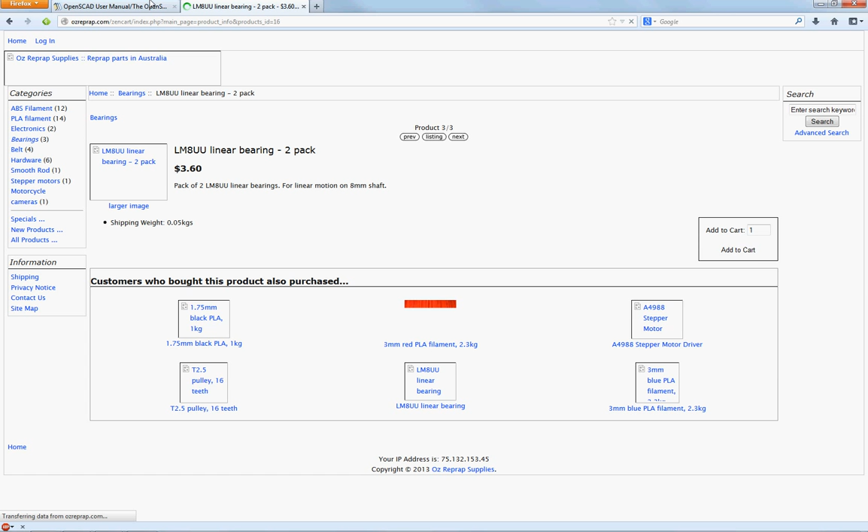While that's going, I'm going to kind of tell you where I'm going to start. I'm actually going to use an iterator function, a for. So it's going to be using it to... LM8UU bearing pack. So these, right there. There are three rows of bearings in a plastic sheath and surrounded by a metal pipe.

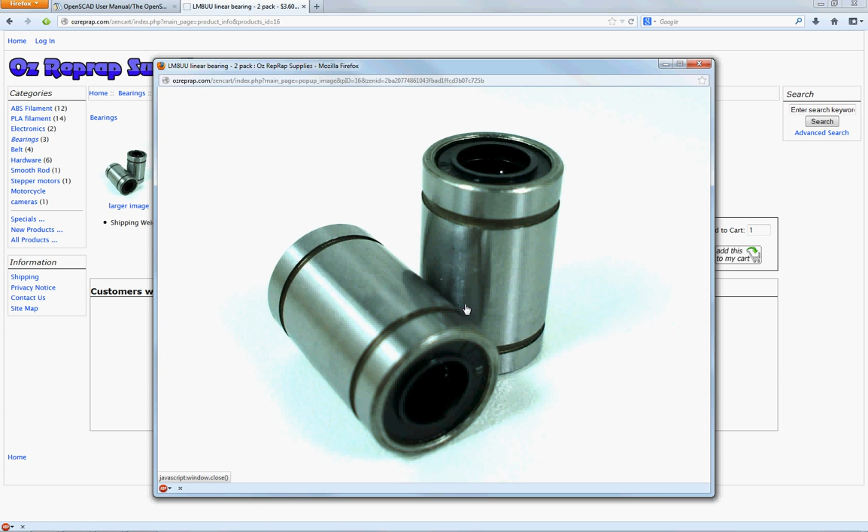I was thinking I could print something like that. Do a little bit of machining on a metal tube. Maybe make a lip and use some snap rings to keep it in and see if that works. So, again, I'll go back to this. We're going to use an iterator function. We're going to use for and something similar to this, for i = [0:5].

But I'm probably going to use like for i = [15:10:30]. That doesn't seem right. That's too little. But yeah, that's just a general idea. It's a very simple bearing idea. So we're just going to start with a cylinder that we're going to end up differencing. But I like just seeing it and working at it point by point.

Let's make this actually kind of accurate to spec. The LM8UU, the LM is long something, and then that 8 is the inner diameter. So we're going to have the radius of the exterior be 10. 10 sounds like a good number. So the radius will be 10, height will be, let's go with 30. 30 sounds like a nice round number. And then semicolon. Always remember the semicolon.

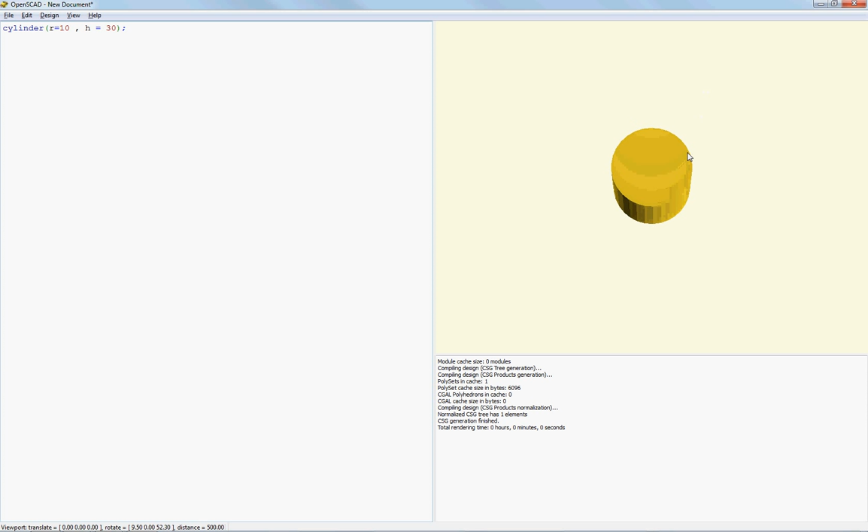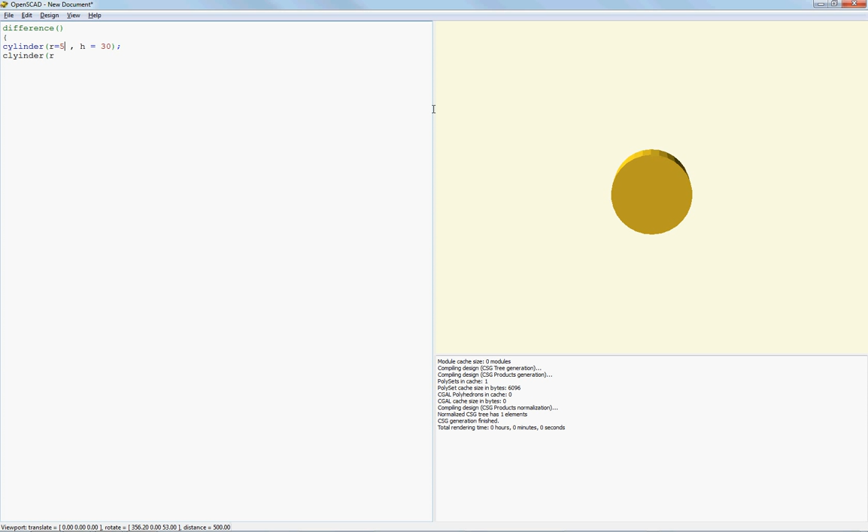That looks like a nice bit. And then we're going to do a difference. We're going to difference from that cylinder. And that cylinder is going to be radius of... radius, not diameter. So this radius is going to be 4, because that LM8, that 8 stands for the diameter, and an M8 rod will fit through that. And that height's going to be exactly the same because it's going to be a straight bore through the pipe.

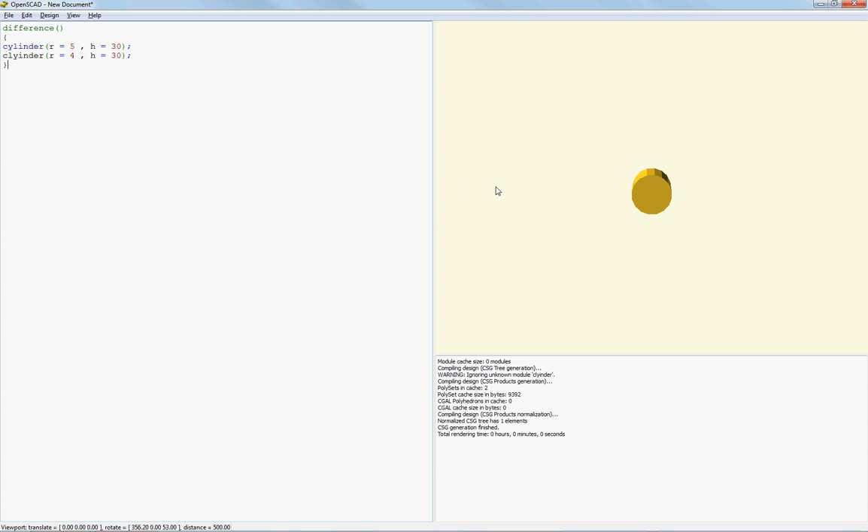And then we do our finishing curly bracket and hit F5, and it does absolutely nothing. Why does it do absolutely nothing? What did I do wrong? No, something's wrong. H equals 30, difference. Let's check something. Cylinder rotation. We're going to go to view, and we're going to show. Let's try grid only.

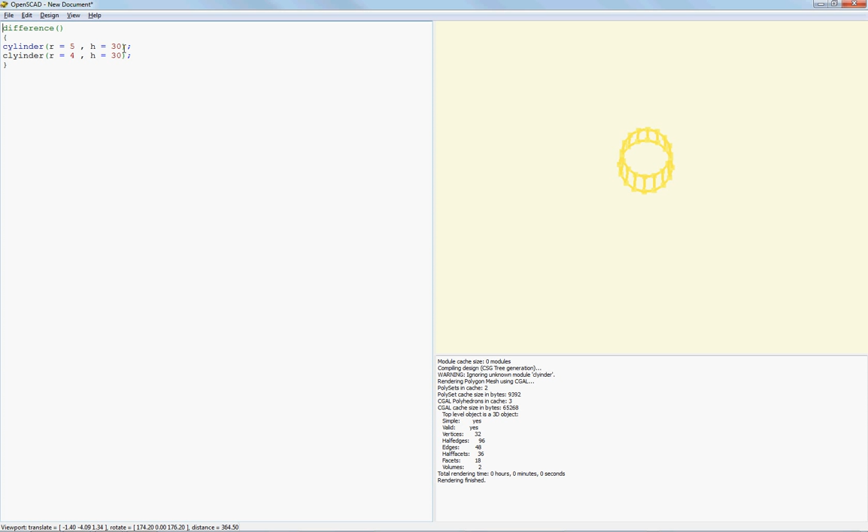Right now, we're going to actually comment out that difference. I see my issue right now. I misspelled cylinder. Spelling matters a lot, as you can see. So we hit F6, and we're going to get a nice round bearing. That looks more like a bushing start right now.

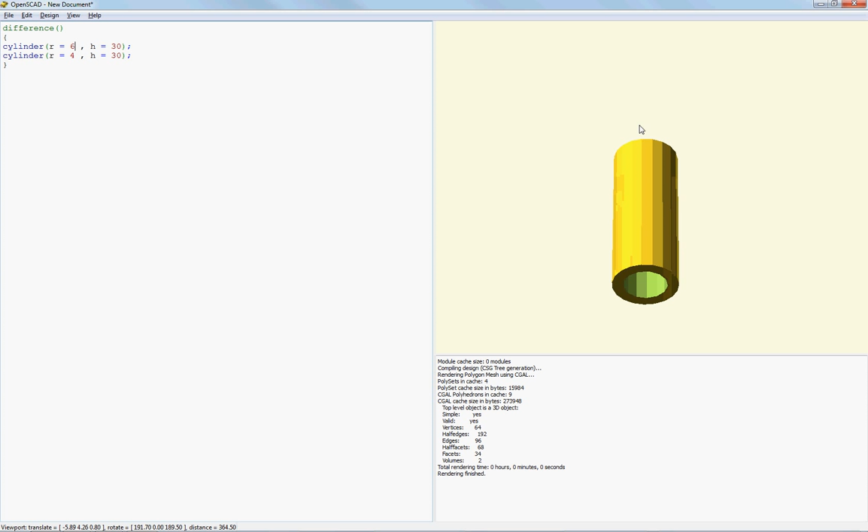Those walls seem kind of thin if we're going to insert millimeter size bearings. So I'm going to go to 6, bring it up, F6. So that seems a little bit beefier. I like that a little better. Okay, so what we're going to need to do is start a row up there and just get the bearings embedded into that wall.

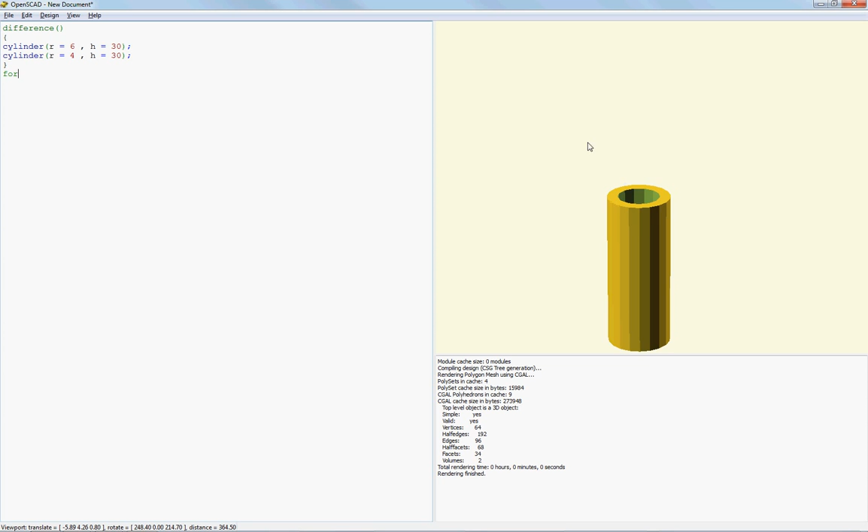So what I'm going to do is just make it work and then difference it from that object. So we're going to go back to that for loop and just get a good understanding of how that works. So again, we're going to do for, parenthesis, I equals height of 30. Let's do I is 5, increment of 5, and it's going to go to 25. So what that's going to do is it's going to start at 5 millimeters up, and every 5 millimeters is going to be an instance of another sphere.

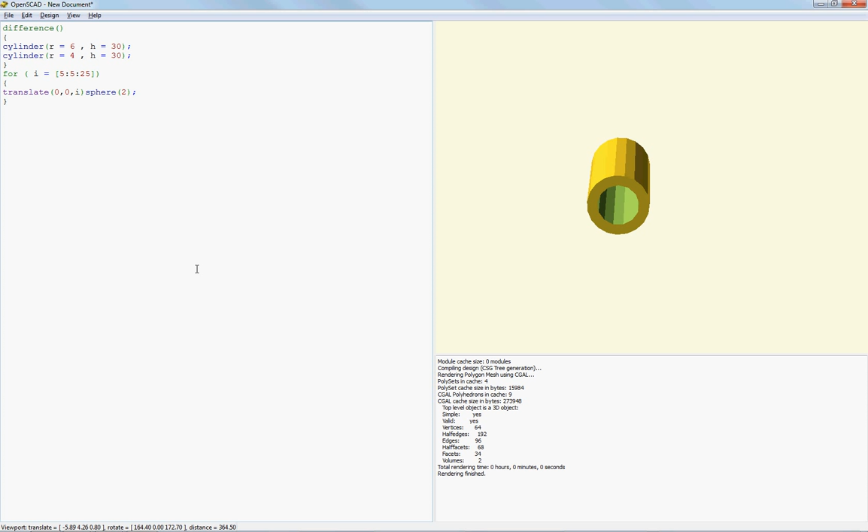So then we're going to close off that, add a parenthesis, and is there anything we have to do for that? There is. We're going to have to do a curly bracket, and then we're going to have to do a translate 0, 0, and I. And then we're going to do sphere. And what's a good size for a ball bearing? We did 8 and 12, so that's a 4 millimeter distance. Let's do a ball bearing of 1 radius. So it'll be 2. That'll be a fairly beefy bearing. You can just leave that like that, and it should generate a sphere. And there we go.

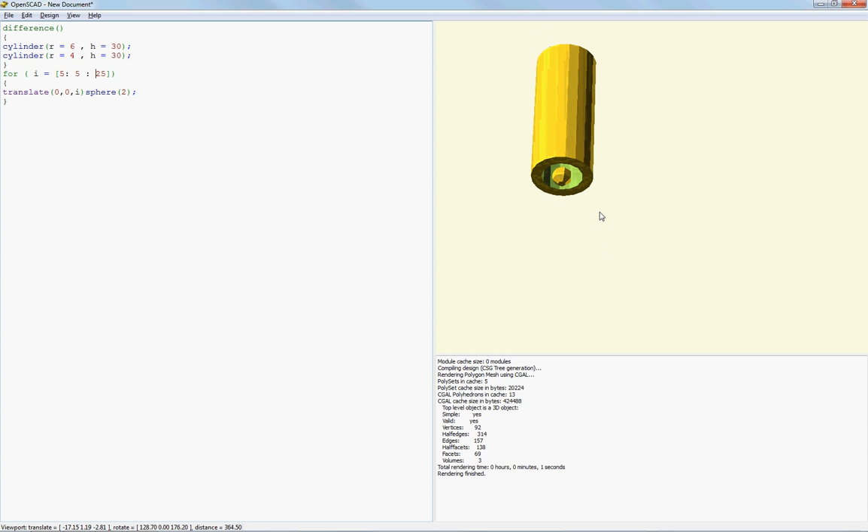So what happened there? Translate. So right now that's only 1. So I think this is what happened. This is exactly what happened. I forgot the square brackets. The square brackets are important. F6. So now you can see there's like 5 in there. There should be 5, I believe. We're going to go to grid only. The contrast is kind of crappy, but you can see a little better that there's 5 in there. 1, 2, 3, 4, 5.

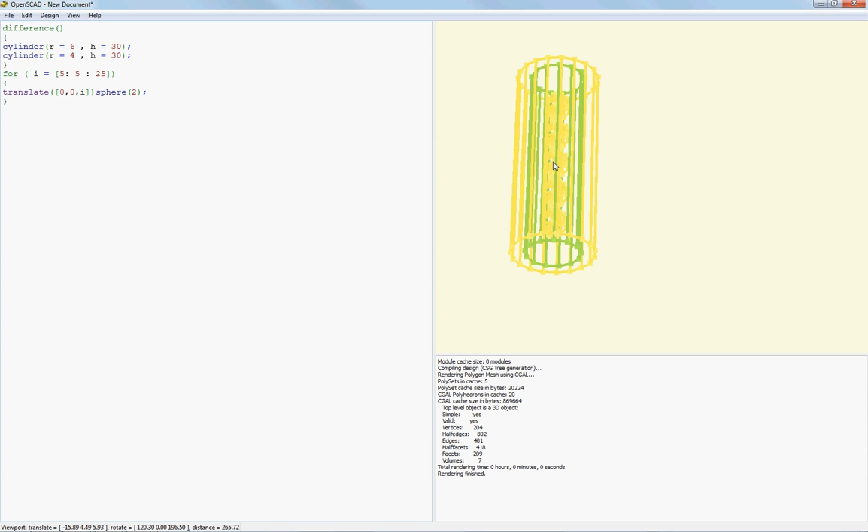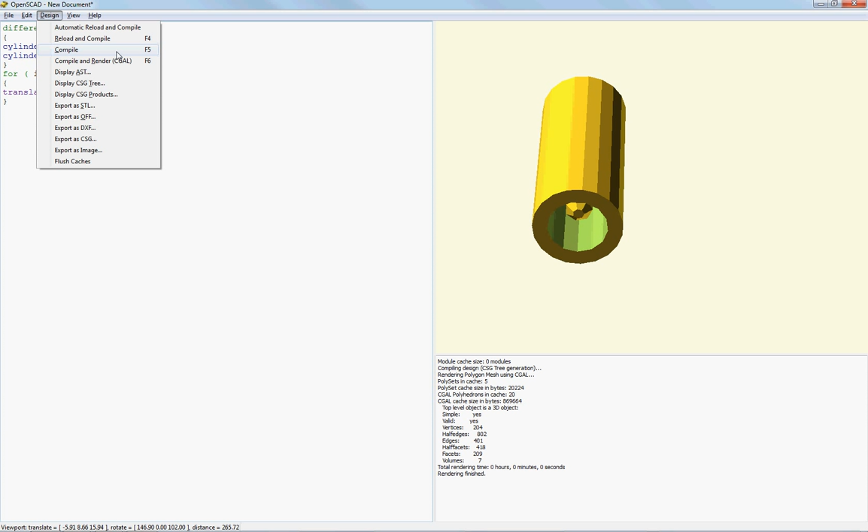Now what we're going to do is we're going to translate it into that wall. So I'm just going to redraw it real quick with an F6. What does F6 do again? It redraws it in a different form. F6 does a compile and render with CGAL. F5 just compiles it kind of dirtily. So we've got that. They're sitting at the center of the axis where X, Y, and Z meet. Well, kind of. They're sitting on X and Y's center.

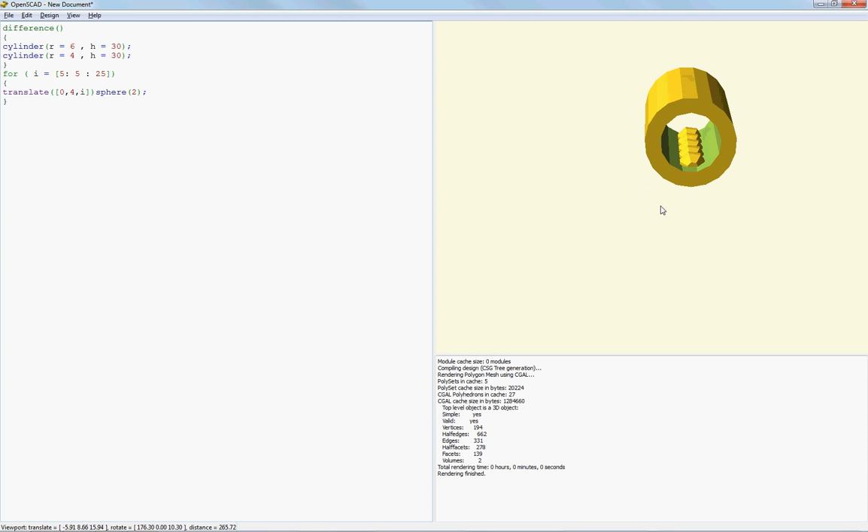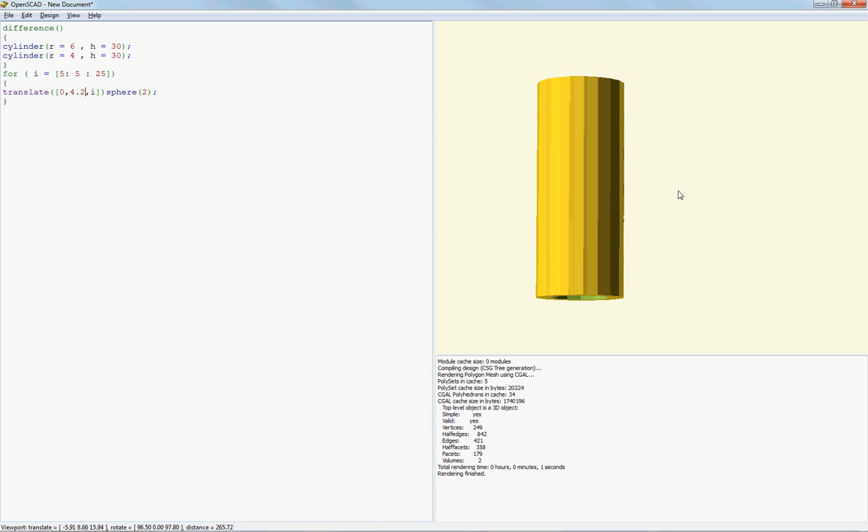This is a radius of 4. So if we move either the x or the y by 4, we should intersect the wall with the sphere. So we're going to do y. Hit F5, hit F6, get a better drawing. And you can see they're now embedded into the wall. Those should stick in there if you just insert them while it's printing or when it's designed. There should be more than enough in there. I'm going to just do like a 4.2, F6, and that's perfect, I think. They'll be in there, will fit.

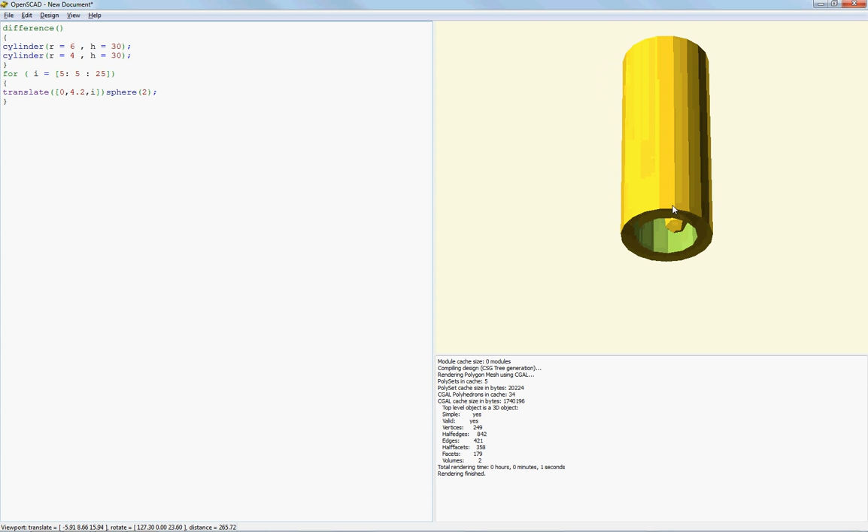Ooh, I see an issue with this actually. My issue that I see right now is that it's not going to be an 8mm space. It's going to be 8mm minus the radius of the sphere and whatever is taken out for that little translation I did. So it'll be like 1.8. It'll be 0.8 millimeters too small for an 8mm rod to go in there. So if I hit 5, is that right? No, that's not right. It'll be 1.8 millimeters small because it's a 2mm sphere, or a 4mm diameter sphere.

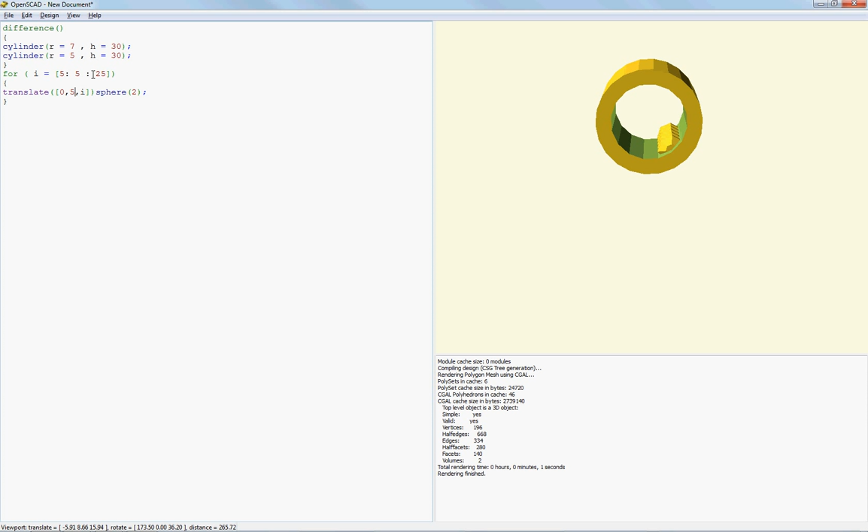So if I hit F6, and we're going to bring this up to 7, so that's 14. And there we go. That's a little better. And I forgot to change these numbers. Let's go 5, F6. And there we go. So this is 10 minus 2, which is 8. So these will actually, I think if my math is right, fit an 8mm rod.

So now that we have this done, what we're going to do is we're going to rotate these, and I'm just going to constrain it in 3 ways. So it's just going to rotate every one by 120. I believe I can capture this in here, and I'm just going to tab it over. I wonder, how's this going to work? Well, let's see if this works. If not, I can cheat and be lazy. So I'm learning while you're learning. It's not ideal, but it happens. 120, and it's going to max out at 360.

And I forgot those square brackets again. The square brackets seem to define an exact rotation. I'm going to try this. Rotate. Because if this doesn't work, I can do a...

I'd have to reassign the... oh, crap. I'm going to take the lazy way out of this, actually, right now. So what that means is I'm going to

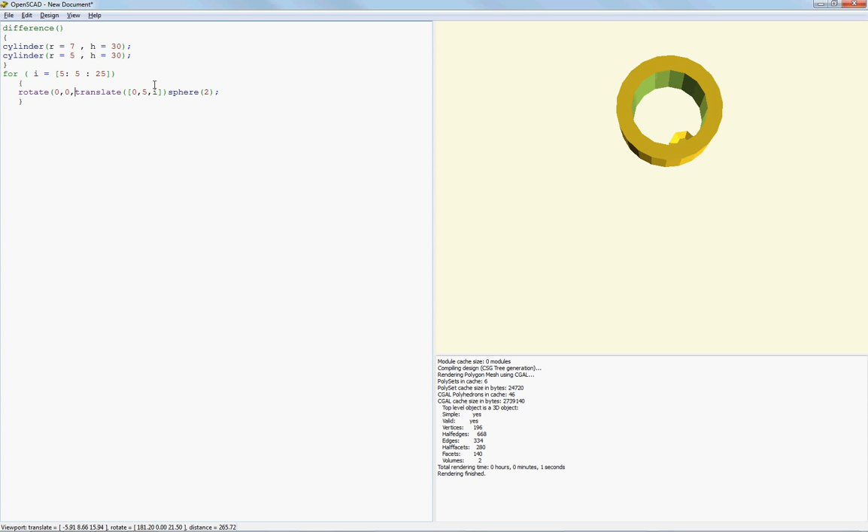Add a rotate in here, and rotate it around the z-axis, I believe. This one doesn't have to do it, actually. This one does. Rotate, 120.

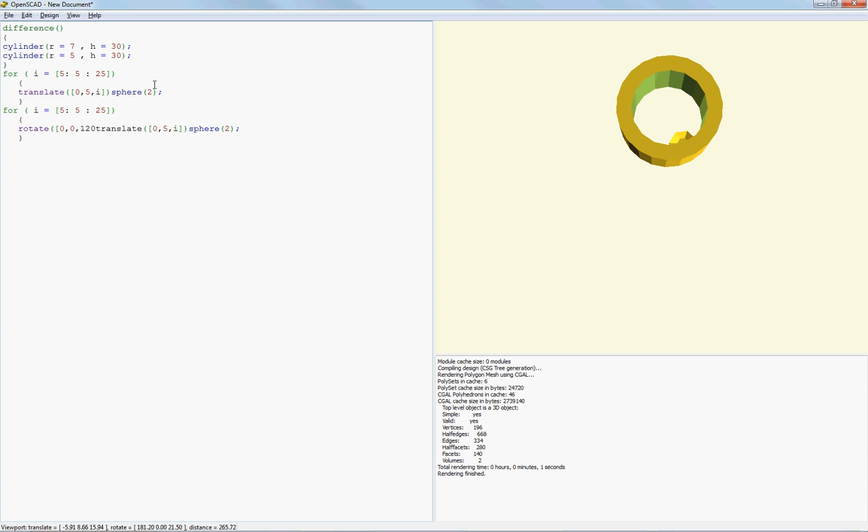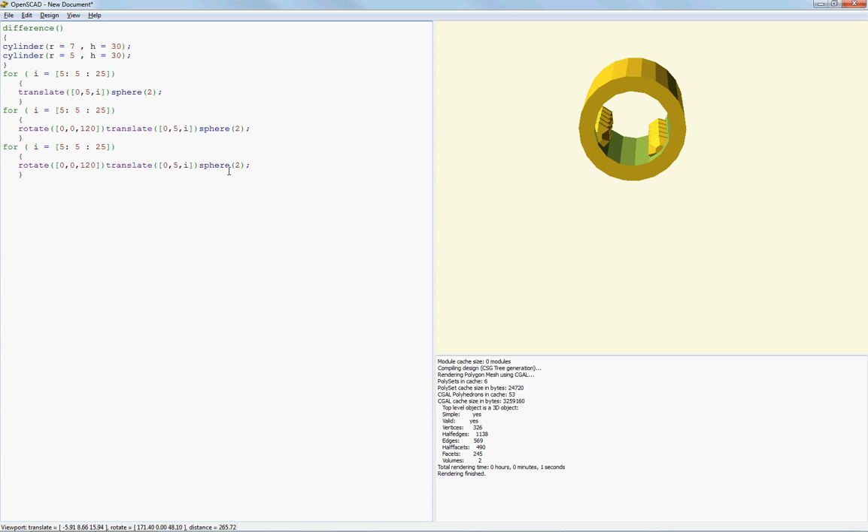And that'll be F6. Takes a little longer to generate, but you see it's about 120, and then I'm going to do it again. I'm actually just going to copy this and make it a negative rotation, and that'll be where I want it.

F6. Yay, trig coming into use. So there, that'll actually cover that and work. My only problem is there may be an issue with the bearings not sticking in. I'm not entirely sure. I don't believe that should be an issue.

But the issue I had with this was I was going to try to contain a for. Actually, I don't even need to do this. I could do this all in one thing, I believe. I could. I'm going to do that.

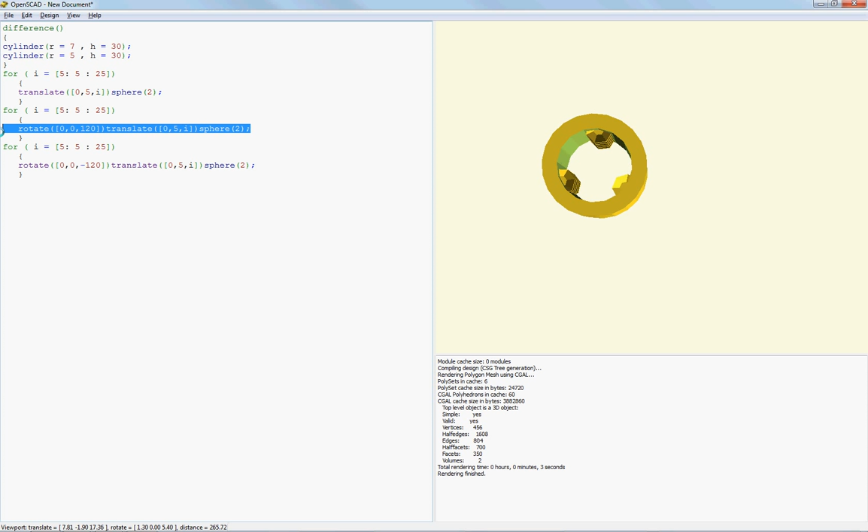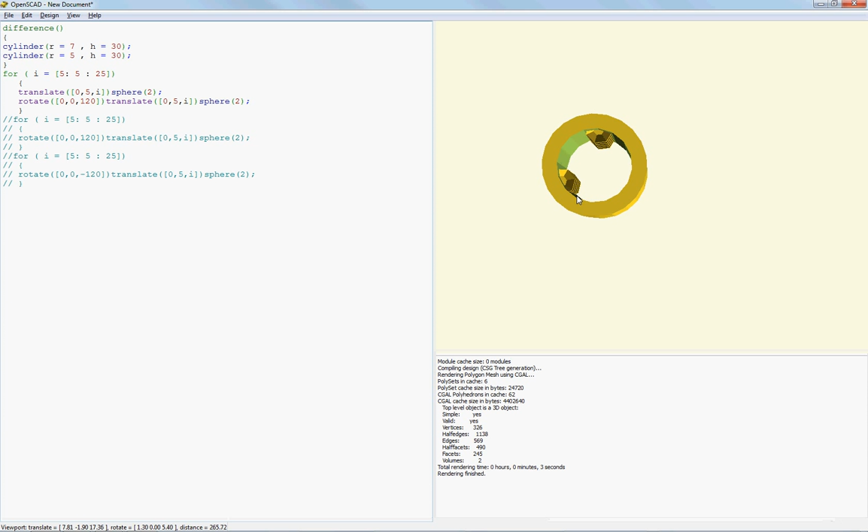But I'm going to be smart about how I do it. I'm going to hit that, Control V. And then I'm going to do, I believe it's Control D that comments it out. Yep. F6.

So I can be a little lazy on how I do this. So this works. There's probably some math I could do that would make it work internally. I know there is, I just don't know it off the top of my head. I don't usually... I have a kind of dirty work process that I'm slowly refining, trying to make it a little speedier to generate.

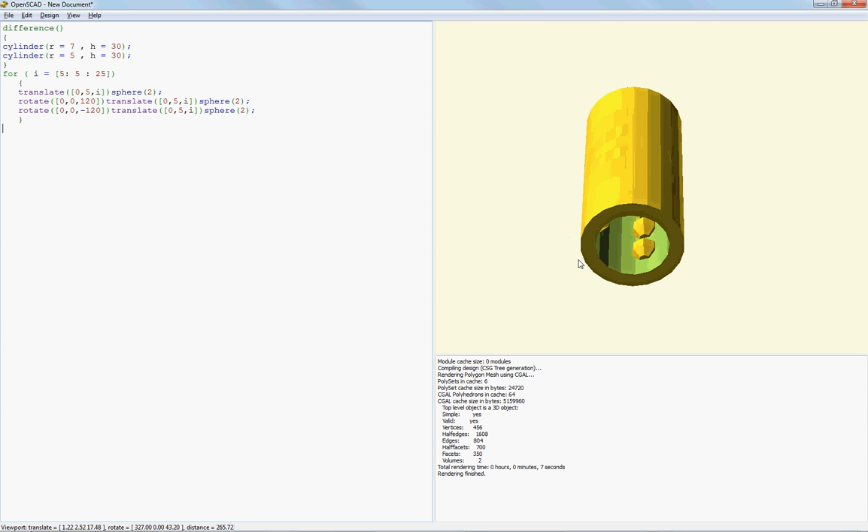And here we go. Yeah, there we go. It just makes the code a lot easier. But the issue was there's I equals 5, da-da-da. Well, I is that, and I used I for that. I was going to use I's for that rotation.

I think I can use other variable. I know I can use other variables. I just didn't. I was afraid it was going to make it messy.

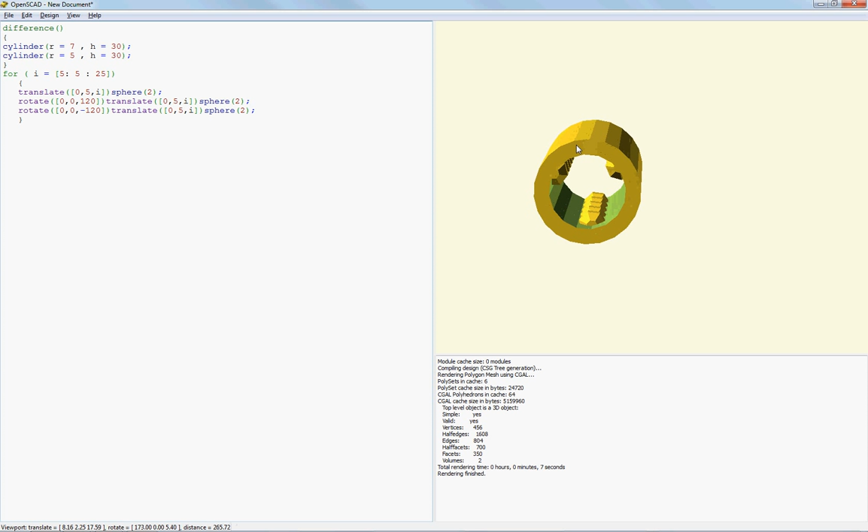But yeah, this is the object. It's right here. Kind of sloppy. Oh, I haven't done this yet, and I'm going to do another difference.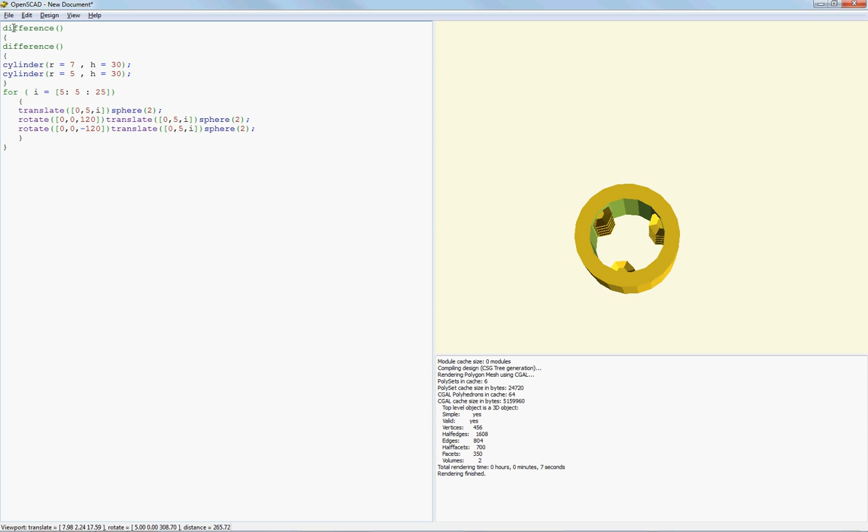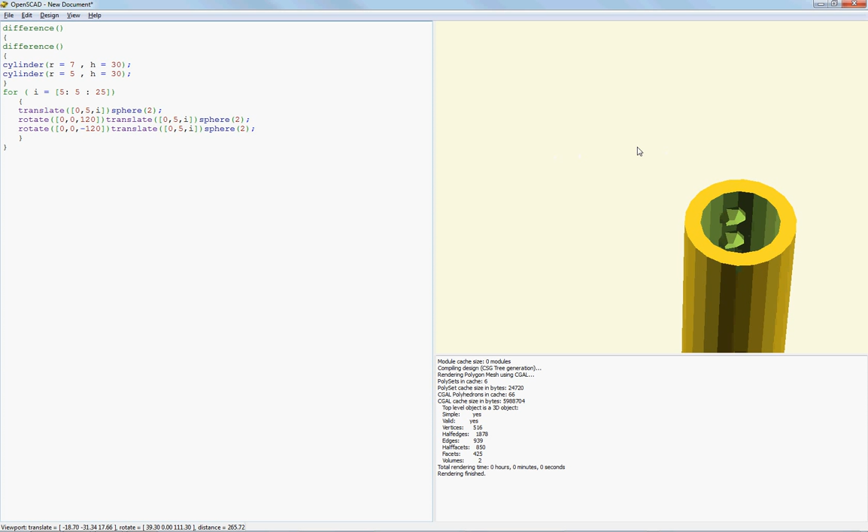F6 to get rid of those bearings. And I'm actually going to up that resolution for those holes. So that's going to be a comma, $fn equals 10. I think 10 is a fairly good one.

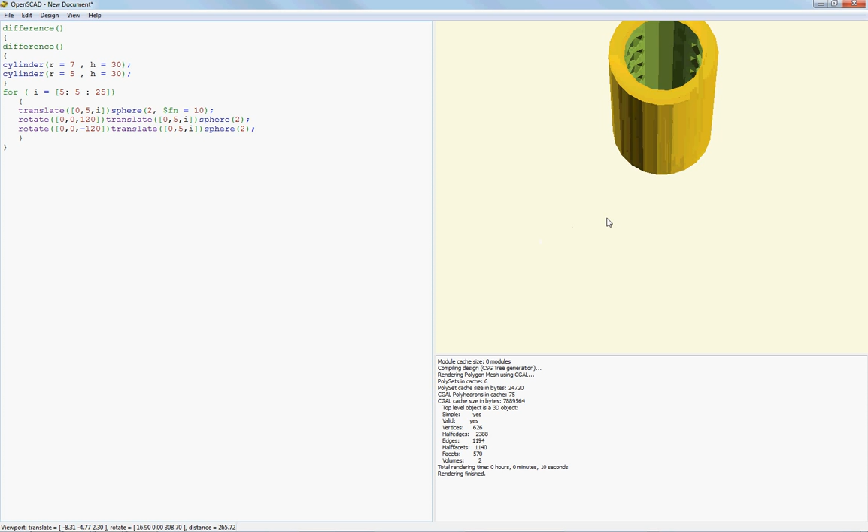We're actually going to test this out real quick, see how it comes out. Takes a decent amount more time to generate the code. It looks... 10's not bad. That's the one.

So yeah, I'm just going to up these all to 10. I'll go 15. And we're just going to copy this and overwrite all these. F6.

And take it a little longer, but hey. Alright, it's taking a bit longer than what I was expecting. But this just makes it a smoother part, and this is where it needs to be smooth. The larger parts aren't going to touch the rod at all, but the bearings are, and it's also where the bearings are going to touch the sleeve.

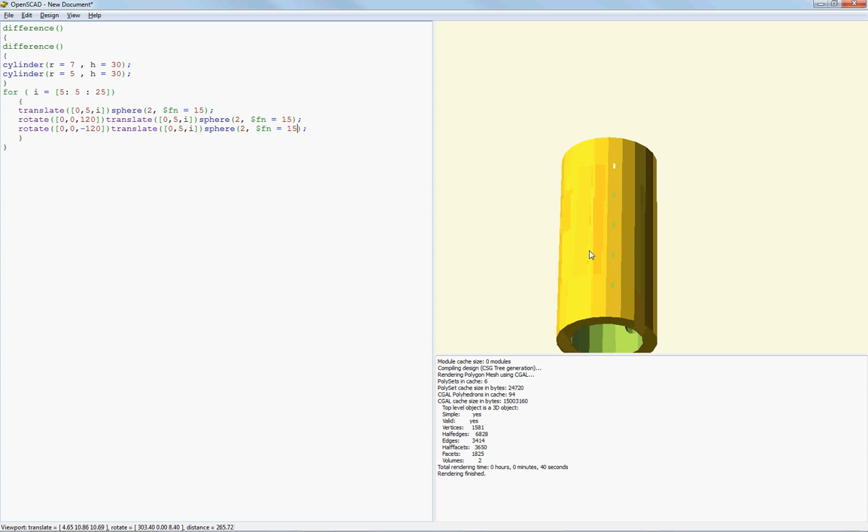So the better finish you can get on the bearing ports, the better friction reduction you can get on the rod. There seems to be an issue with the

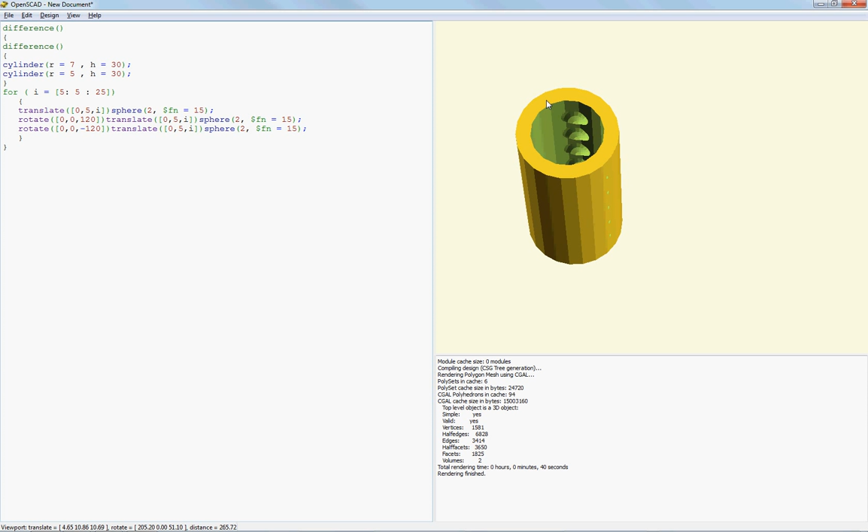spheres coming through. Translate 5i, rotate 120, translate. That shouldn't affect it. So I'm just going to bump the outer to 7.5, not too much more material.

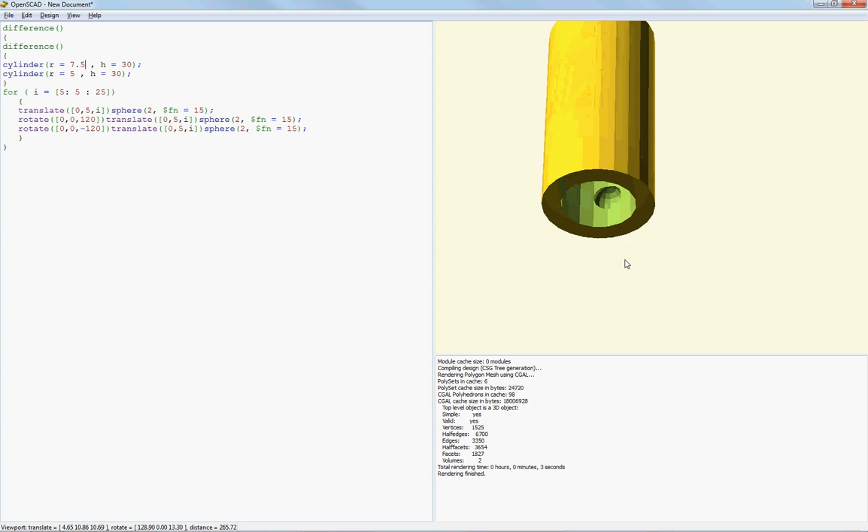These are kind of chunky, but they're an incredibly useful functional piece that may serve to lower your cost, I'm not sure, of building a 3D printer. I kind of obsessed with building them.